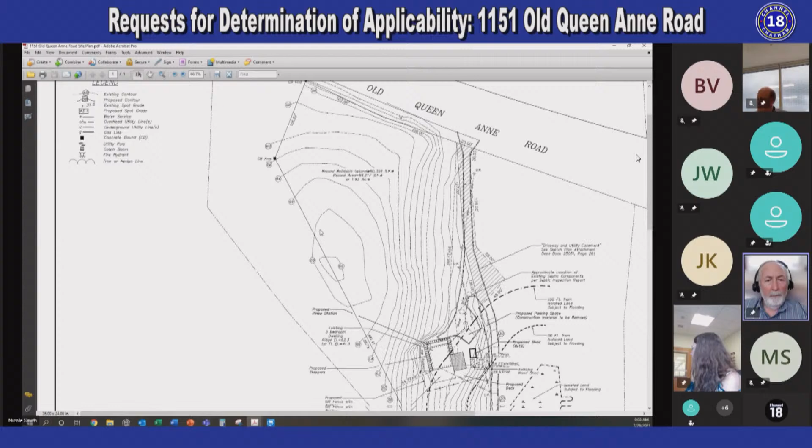First we have a request for determination of applicability for 1151 Old Queen Anne Road, Cleanfield Capital LLC, map 6H parcel 1A, to replace an existing deck, construct a new patio, remove construction material, place a shed, and restore a driveway. I will share my screen to show the proposed plan. Let me know if that's good. Yeah, we can see it. So who is here representing on this?

David Clark is here representing. First, David, can we address the fact that zoning doesn't like the shed issue before we decide if we even need to vote today? Sure. I agree with the zoning determination, so we're going to find another place to put the shed. Unfortunately, along the east side of the building, trying to meet the 25-foot setback puts the shed too close to the house.

There's plenty of room to the right of the driveway and on the west side of the house. It'll require some excavation, but it'll be outside the 100-foot buffer from the isolated wetland. So we can probably work that out. I know Mr. Nandi is listening in; if he has comments on that I haven't had a chance to review it with him, but I'm happy to talk about the rest of the project.

It would seem that we could just talk about everything except the shed. So Mr. Nandi bought this property last year or earlier this year. The previous owner had started some renovation work, which is why I submitted the existing conditions plan that we had done for the previous owner. The previous owner removed the entire deck, as it was in tough shape.

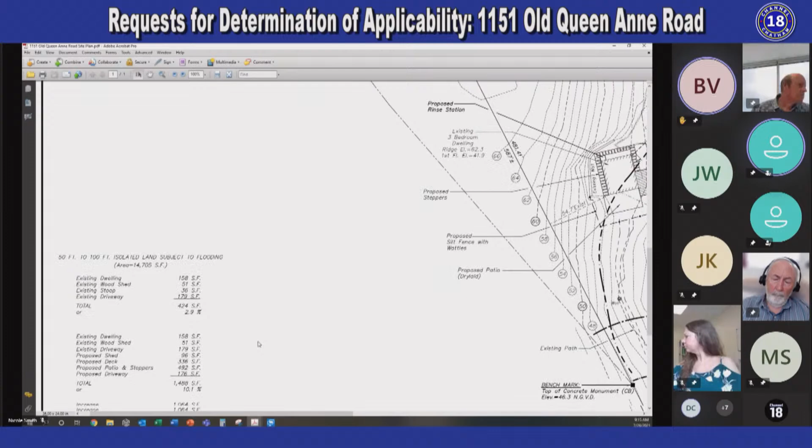The patio and the stepping stones within your jurisdiction is 492 square feet. And that's all new, the patio isn't a replacement, it's new. But the deck that we're proposing is smaller than the deck that was there. So, like I said at the beginning, if we don't count the new shed, we're about 134 square feet of increase within your jurisdiction.

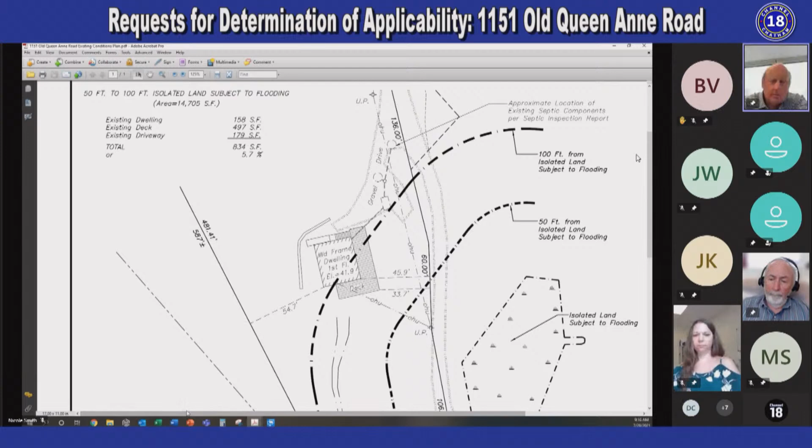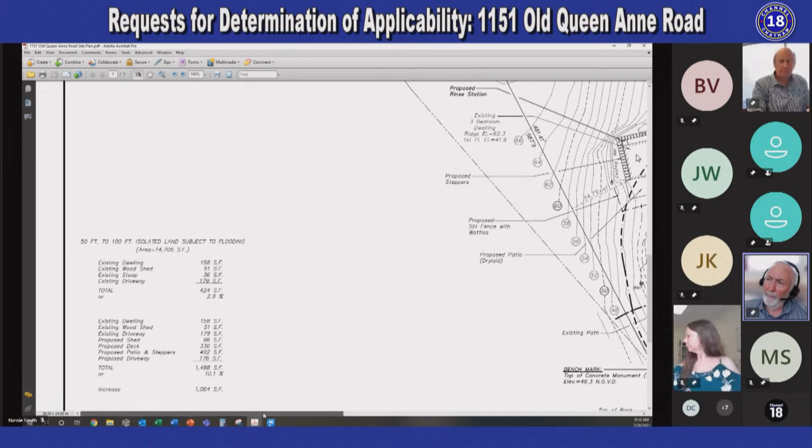I'll swing back, I guess this is one of those tough ones for me. Maybe not, it may not be tough for others, but we are increasing coverage, David, if you're assuming that we consider that to be a pre-existing deck. I think you could argue both ways. But anyway, we know that we can't vote on this today because of the zoning issue.

So you had to submit something revised. We're increasing coverage. Is there any way that you could, for example, offer us something, shrubs, something that would compensate to some degree for the increased coverage?

We talked about that, but we feel that there's really no loss of wildlife habitat as a result of the project. It's the areas immediately adjacent to the house that are currently disturbed, even though the old deck is not there, it still remains disturbed. And the vast majority of the rest of the property is in undisturbed state. So we think this is just a minor increase in site coverage, but also more importantly, there's really no loss of wildlife habitat.

No trees are coming out. No substantial vegetation is coming out.

I'm thinking of a recent RDA application that we actually turned down that's similar to this, where they were putting in a deck on sonotubes in a disturbed area, and we judged that would need to come back as an NOI. So I personally think of this as similar to that, unless someone else has a different view. That was on a coastal bank. It was not in an isolated wetland, which is only under Chatham bylaw, I believe.

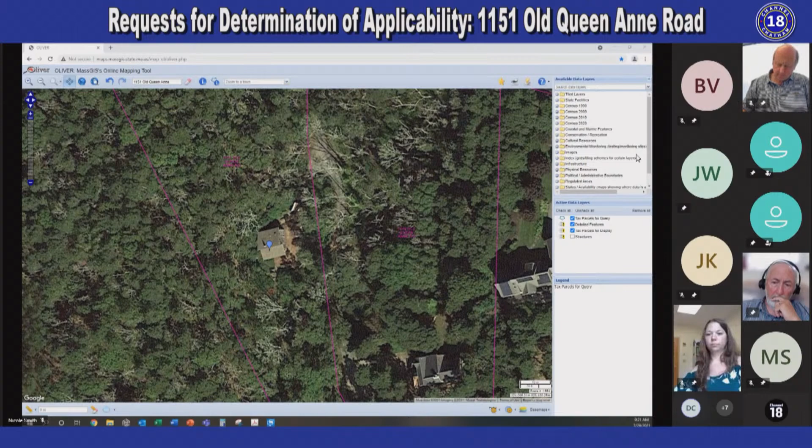So without further discussion, we need to come back - Nikki, in your view, voting on this today would... I would say that we could come to an agreement on whether we are likely to approve or disapprove the project. Then when they get the new site plan and figure out the shed issue with zoning, we could do an official vote at the next available meeting once we get that plan.

Janet, does that... oh, your hand is up. Okay, so without the shed, I understand, and I look at the 2011 site plan and compare it to this, and the new deck and patio are more or less in the same location as the prior deck, but they are enlarged. So I understand David's point that this is a disturbed area immediately adjacent to the house, and it's only in the outer aura to the vegetated wetland.

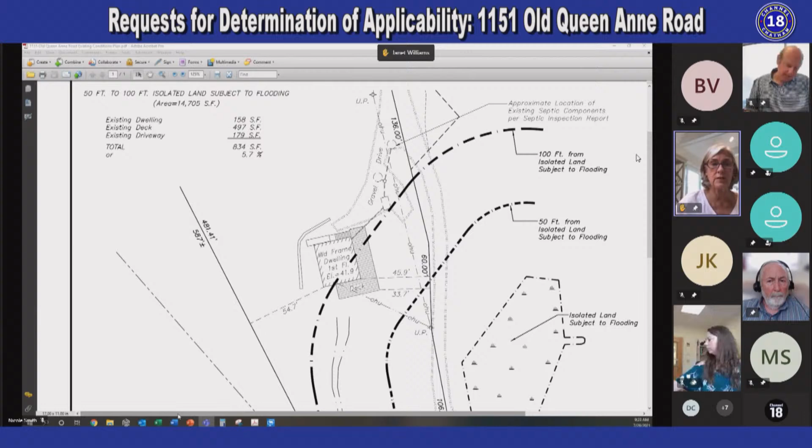However, that may be compelling in an NOI situation, but this is an RDA, so we're called upon to say whether there's any impact to a resource area, and there's clearly 134 square feet of impact to the outer aura. That being the case, I would echo Bob's request that some sort of compensation be offered for that increase in coverage. It may be a fine point, but as a matter of principle, when coverage increases in a resource area we're charged with protecting, we should ask for compensatory mitigation. So if there's going to be a delay, I'd be inclined to approve this in the hopes that the applicant would come back at the final vote with some kind of compensatory mitigation for that 134 square feet.

Thank you, Janet. We have a hand up from... that's the homeowner. Okay, please go ahead.

Hi, my name is Debarshi Nandi, and as David said, I'm the current homeowner. In terms of compensation, do you mean addition of other vegetation around the property? Is that what it means?

Well, what we would normally look for in this case are additional native plantings that typically are adjacent to the resource area, such that it does the most good in terms of providing wildlife habitat and food.

So the resource area, which is immediately in front of the proposed deck and patio - that area is completely undisturbed. But if it would please the commission, if it would make sense to add additional native plantings in that area, that can easily be done. I don't mind adding more to it. But as David mentioned, it is already kind of completely undisturbed, and it has the original vegetation from prior to when I purchased it.

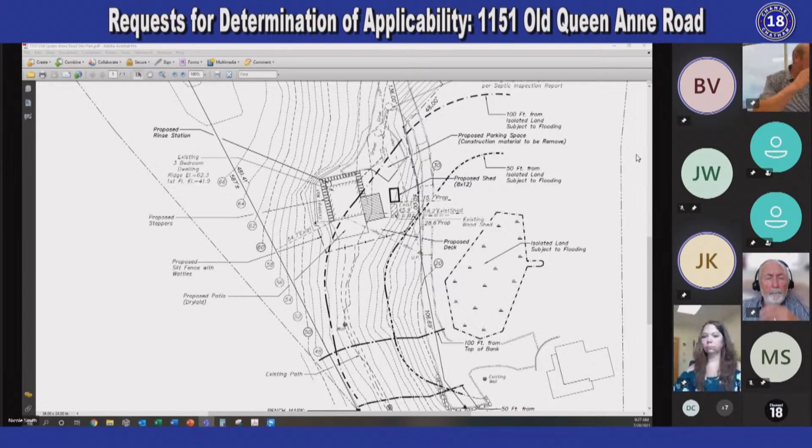All right, so do we have a motion then to continue to August 11th? I make a motion to continue 1151 Old Queen Anne Road for request for determination of applicability to August 11th. Clark, second. All right, roll call vote.

Bob Delvecchio, aye. Janet Williams, aye. Tom Clark, aye. Joe Kitts, aye. Karen Latin, aye. Terry Sullivan, aye. And I vote aye as well. So that's unanimous to continue. Thank you.

All right, next up we have 373 Bridge Street, Stephen and Helen Johnson, map 16B, parcel 25-22, SE 10-3242. This is for a plan change for hardscape modifications.

Let me share. I don't know, Stephanie, if you want to share, if you want certain plans up at any given time. Good morning, Stephanie Sequin with Ryder and Wilcox, I'm not able to share the documents. Okay, I have it, it's fine. I'll just, so I think if you just put up the conceptual landscape plan that's being proposed. Is that the Hawk one? Yes, okay, yes please, thank you.

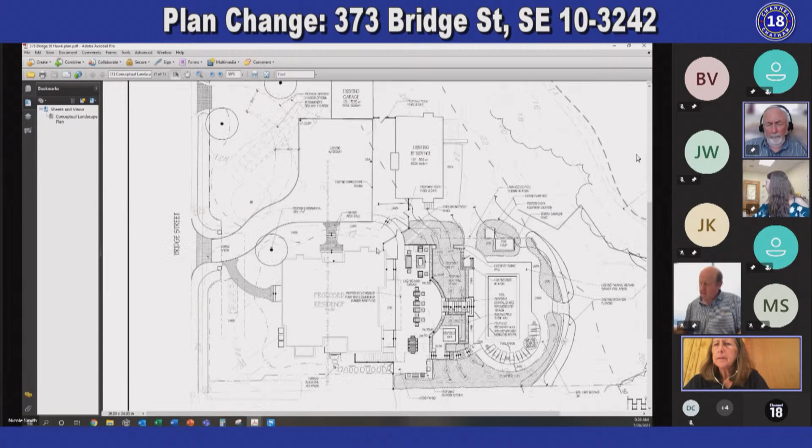Can you see it? And maybe if you can just zoom in on the pool and the upper terrace. Perfect.

Good morning, Stephanie Sequin with Ryder and Wilcox, and I'm representing Stephen and Helen Johnson, who are the current owners of the property at 373 Bridge Street. I think someone from Hawk Design is out there also. This property has 2 dwellings, a detached garage, and an in-ground pool and hardscaping.

The pool and hardscaping were constructed in accordance with an amended order of conditions issued in May of 2019. I submitted, along with this request, an as-built site plan of all the existing hardscaping that was constructed. Since then, since the Johnsons purchased this property, they've been working with Hawk Design, and they've come up with a plan for modification to the existing hardscaping.

What's being proposed: there's a stone walkway that leads from the upper terrace next to the house, from the side of the terrace down to the pool apron at the lower level. They want to remove those stone steppers and replace it with a walkway that's located more in the center of the upper terrace, connecting down to the pool apron.

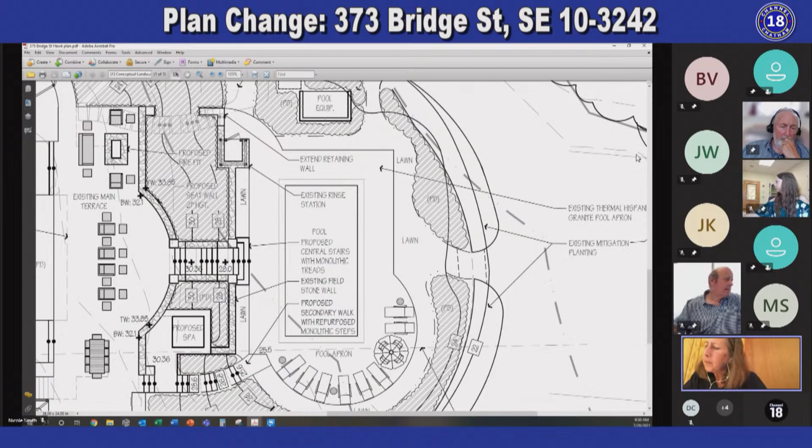Just at the very end of that proposed stairway, on the right end of the stairs at the bottom, there's approximately 42 square feet of new hardscaping that lies within the 100-foot buffer. They're also proposing to remove the existing stone walkway to the north. They will have to extend an existing retaining wall by a few square feet just to retain the earth in that location, and they are proposing to install spa equipment next to the existing pool equipment.

That's that little square, and they are going to install some additional plantings to screen that new spa equipment. Then lastly, there is a pool fence that goes around the entire backyard, and they are going to remove it. The existing pool has an automatic cover, and in Chatham, when you have an automatic cover on a swimming pool, you are not required to have pool fencing. The previous owner chose to have the pool fence, but now the Johnsons would prefer not to have it, so they would like to remove that existing pool fence.

So just as a summary, within the 100-foot buffer there is an increase of 42.5 square feet combined between the new center stairway and the spa equipment, offset by the elimination of 42.5 square feet of the existing stone walkway being removed. So there's no net increase within the 100-foot buffer, with the added benefit that the pool fence is being eliminated, so it's not sequestering the existing hardscaping as it currently is. I'd be happy to answer any questions.

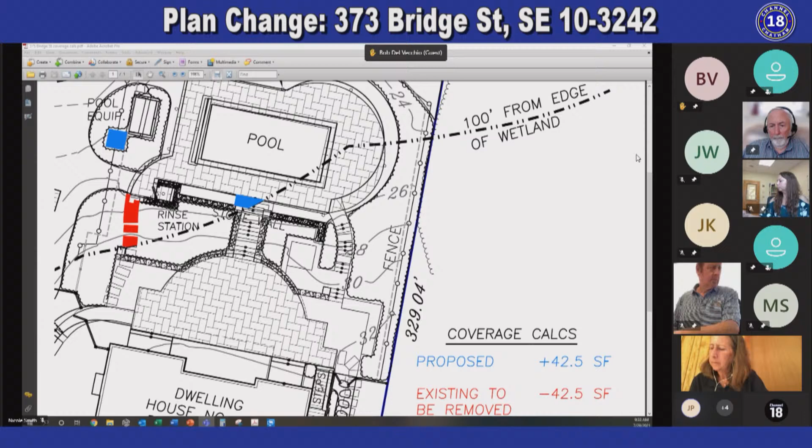We were thinking, so in the previous plan it said non-native, non-invasive, we could either continue with that. I think right now there's some taxus around there, hydrangeas, but we're definitely, I know the client was open to, when we talked about the submittal, that we would be adding probably some more plants in that area, as well as potentially adding some plants down in the lower lawn terrace that's in the 50 to 100 feet range, like at the lower pool, that has all natives. So there might be an option to add some plants down there as well as around the pool equipment.

Okay, so could we have a list of the plants, and hopefully mostly would be native? Correct, yes, and I think what was on the previous submission plan in 2019 was viburnum, clethra, Virginia rose, and there was one other one, but yeah, we can get you a list. Okay, that'd be wonderful, in place of some non-natives, that'd be great. But other than that, it seems like an even swap, so I'm for it, thank you.

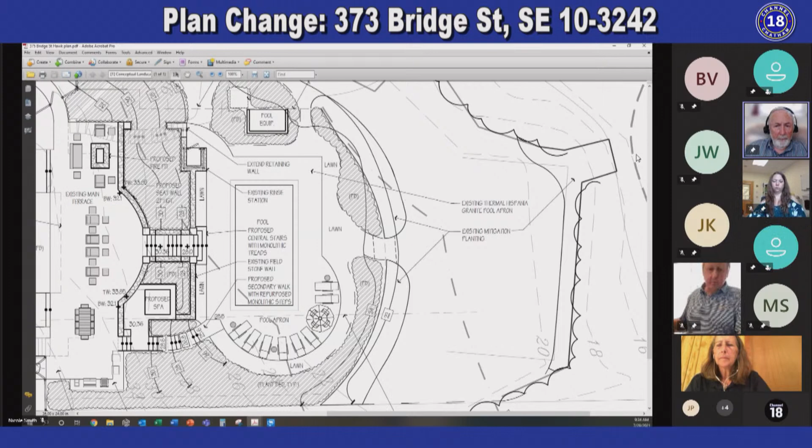I will echo Bob's interest in having more natives. We always want more natives within the resource area, and I'm glad that you're willing to do it. I guess the question is, if you're going to submit revisions, do we need to see it before we vote on the plan change? Bob, what do you think about that?

I think as long as we had a list of what was going in, and maybe even a small plan or a sketch. I don't want to tie anything up, but just so we know we have some guidance as to what's going on.

I'm guessing you guys could probably get that to us pretty quick, just a list of the plants and mark on the plan where they're going. Then I can email it out to everybody, so that way you see it and we have it, and I'll include it in the file. Then I can issue basically a letter that says we accept your plan change—this is the new plan and the planting list that we are now approving.

Yeah, I could definitely get something over to you guys here in the next day or so. All right.

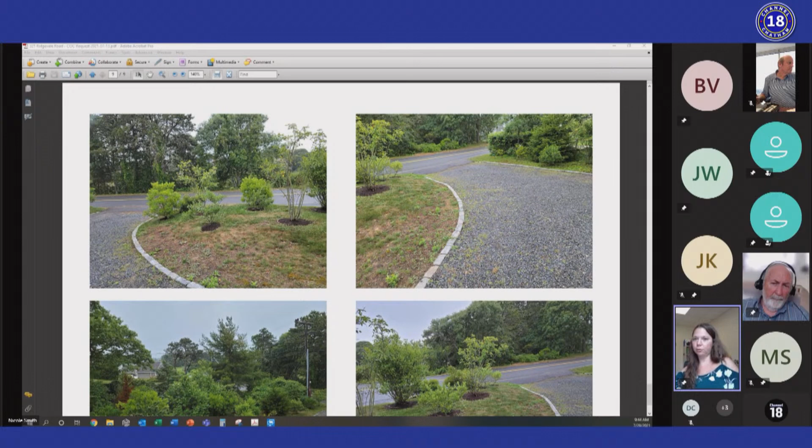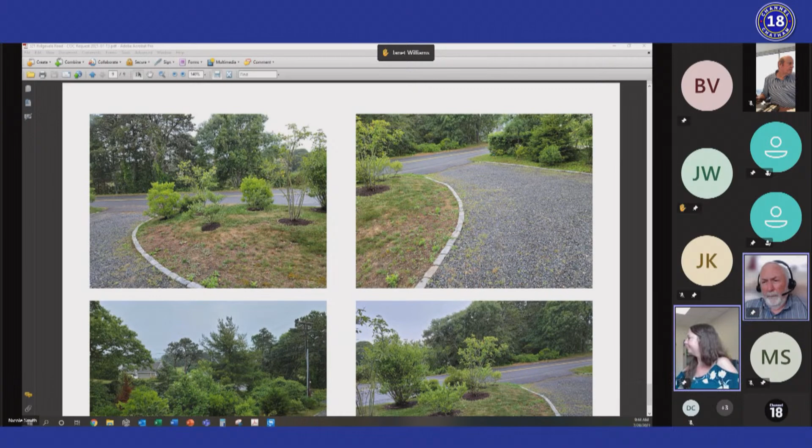Well, I guess if it didn't say anything contrary to what you're seeing, I guess that's all we can do. Yeah, I mean, it was a drawing that shows a lot of vegetation, but the actual plants called out were about 10 shrubs, and these are still growing, obviously, and will lush out. The grass will hopefully spread. So I don't really see a reason to deny it, especially since this part and everything is so well vegetated.

Right. In this Janet area—Janet has a question. Yeah, I'm looking at the plan that was submitted for this, and it's not showing me the driveway or the resource area line. So is it possible that part where the driveway exits onto Ridgevale Road, that does seem sparse, is that outside of jurisdiction? Is that why maybe there wasn't a requirement? It's not out of jurisdiction, but I think it was probably considered, oh, it's in the middle of a driveway and a roadway. So how beneficial is it anyway?

No, at certificate of compliance time, all we can do is determine that it was in compliance with what was required, not what we would have liked to have been required. Right, we can't go back. Okay, yeah, and this is an older one, so. Not as old as Nickerson Lane, but—seen as old as Old Comers, but yeah.

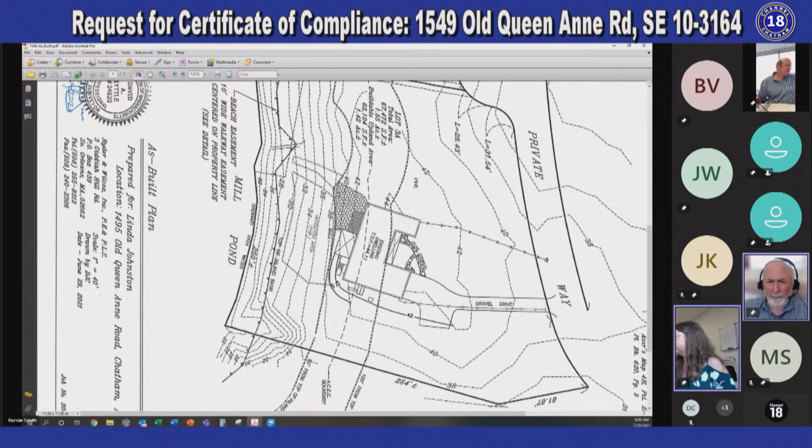Is it pervious? Yes, well, it's a dry lay — there's grass in the middle of each of the stones. Right, it's dry laid, basically, but it wasn't on the plan. The steps were on the plan, so it's just this chunk right here.

And they said they did it for retaining purposes. It was where all their straw wattles were, and they said if they removed the straw wattles and didn't put a little extra wall for the patio, it would have been too big of a slope down. That's what they say, but...

Okay, so it's basically unapproved construction. So if they were to do the plantings you're suggesting, and we approve the COC, we'd basically be approving the unauthorized work. Yep, that's built.

Bob, I have a question. Certainly. I noticed the address on the as-built plan provided is different from the address on our agenda. The agenda says 1549 Old Queen Anne, and the as-built says 1495 — I don't know if by accident. I wasn't sure if we were going dyslexic or what was happening, since it's all the same numbers in different orders. At some point the address changed — it was 1495, I believe, but then it got subdivided and changed to 1549. So 1549 is the correct current address.

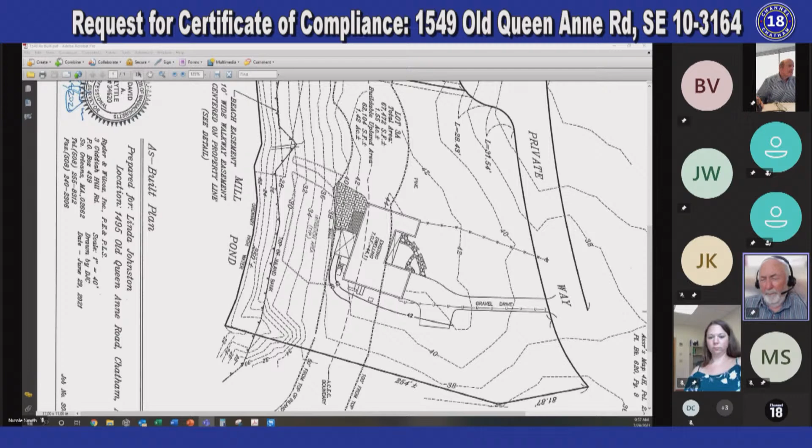After that, we just have the minutes for June 23rd and July 7th. Delvecchio sent a couple corrections, so those minutes were reloaded into the Dropbox a couple days ago. If anyone else has corrections, let's deal with the June 23rd minutes first, if anyone has anything there.

I do have one. It's kind of snarky. I don't know if I should even say it. I'm kind of snarky, so I appreciate it. Yeah, okay, I'm going to do it. You can feel free to reject it.

This is on 0 Northgate Road, as you might expect. Where it says Bob Rawls is still opposed, blah, blah, blah, since the resource area is being disturbed, I was going to add that 12 mature trees are being removed in exchange for 12 shrubs, which I'm still a little tense about. Anyway, I'm just offering that up. You can put it in if you like, or if you think it's too snarky, leave it out.

No, I think it's a good thing. Yeah, Bob, if you could just send your wording.

It'll help me sleep a little better at night. Yeah, if you could just send your wording to Crystal, she can copy and paste it right in.